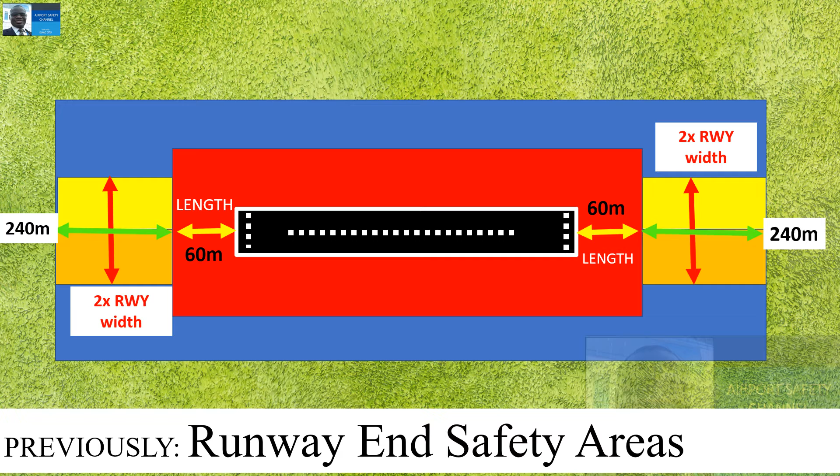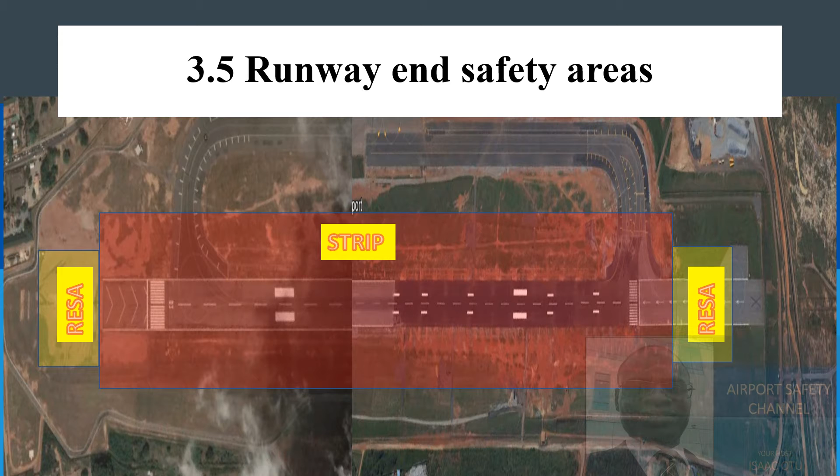Previously, we looked at runway end safety areas, and on your screen you can see the runway surrounded by the strip, and beyond it we have the runway end safety area. For a better visual display, you can see the runway surrounded by the strip. At the ends of the runway, we have the RESA as shown on your screen. It is very important that you have a clear mind on where the RESA is located.

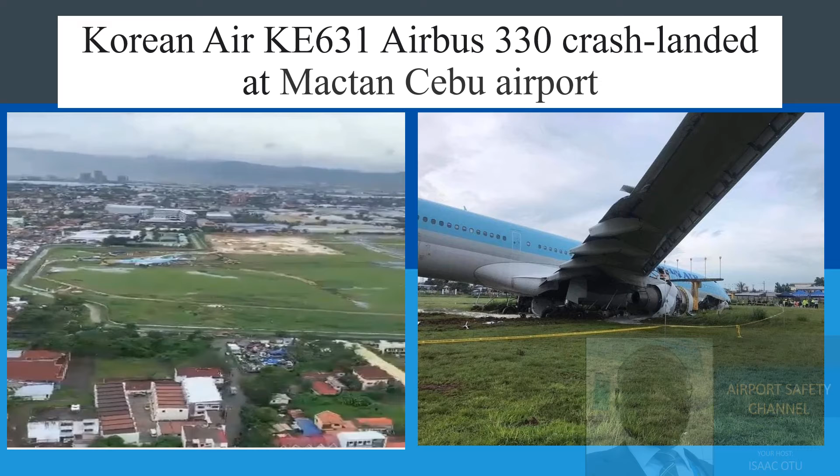In this picture, you can see a Korean Airbus A330 which also went off the runway and stopped in the runway end safety area. Yes, the runway end safety area is very important for aircraft safety. So, what do you look out for when you are inspecting the runway end safety area? Number 1 is objects on the runway end safety area. An object that can cause secondary damage to an aircraft must be removed from the runway end safety area.

Imagine the 2 aircraft which we just saw in the incident going into a wall or running into an equipment that can cause major damage. That may even lead to the loss of lives. So any equipment or installation required for air navigation purposes which must be located on the runway end safety area is required to be frangible and mounted as low as possible and sited in a manner such as to reduce the hazard to aircraft to a minimum.

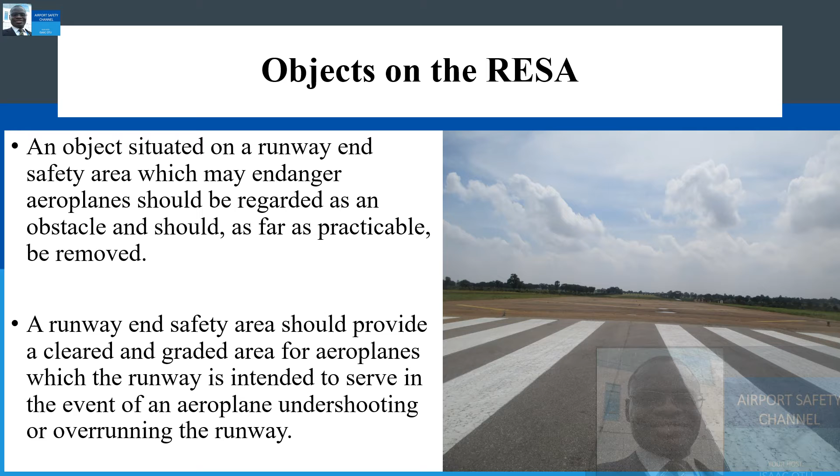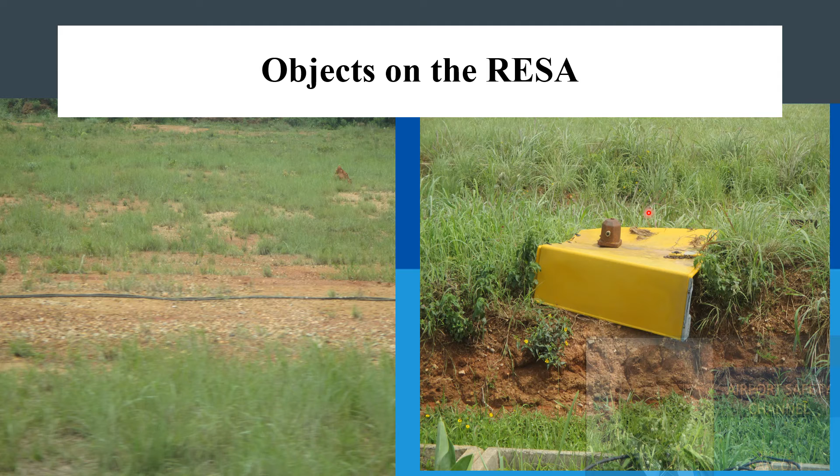It is very important. Also, the runway end safety area should be provided with a clear and graded area for aeroplanes which the runway is intended to serve. So you can see the picture showing a clear area without any objects that can cause secondary damage to aircraft. So once you find yourself in the RESA, look out for things like termite mounds which develop over time and can cause considerable damage to aircraft. Also look out for abandoned objects which have been left forgotten within the RESA and may become a hazard to the safety of aircraft.

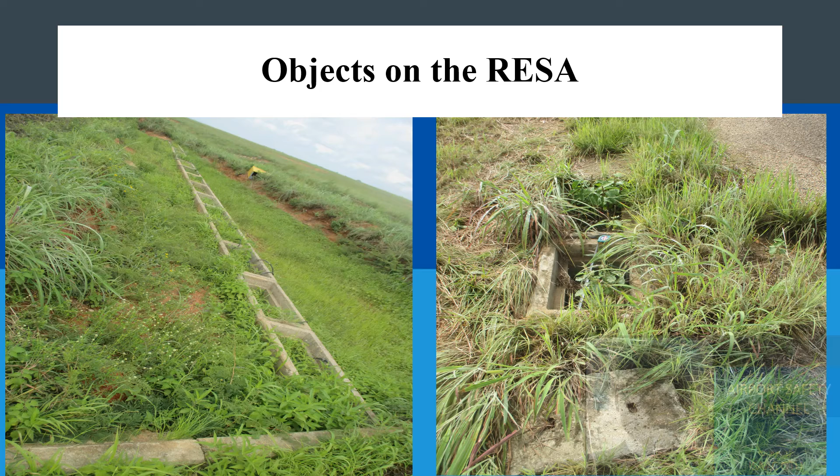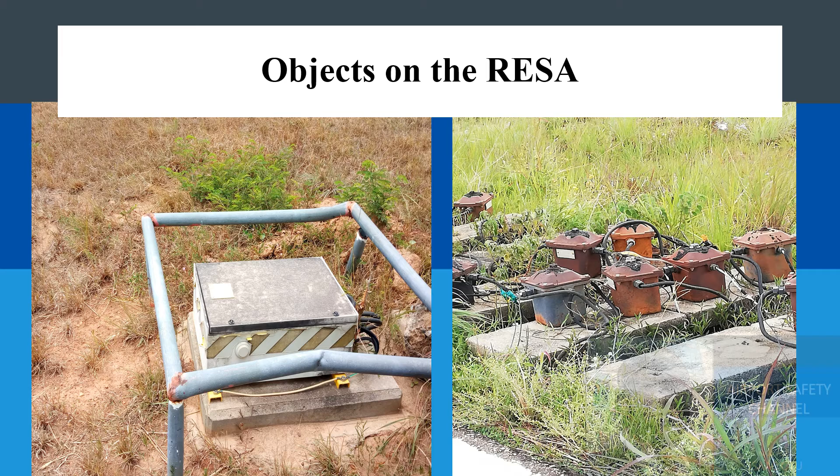If you look at these concrete slabs and these transformers sitting within the RESA, they are also not frangible and they stand the chance of causing major damage to aircraft that goes beyond the runway strip into the RESA. All these things must be changed and their condition worked on to reduce the damage to aircraft during an incident.

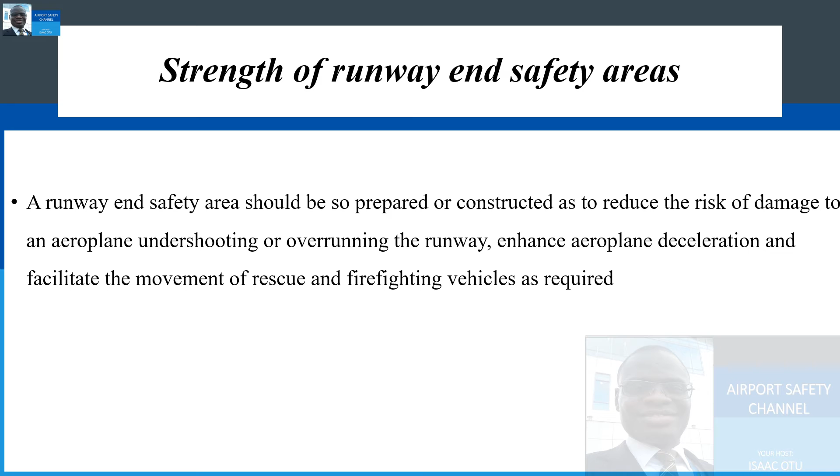Now let's look at the strength of runway end safety areas. Annex 14 requires that a runway end safety area should be so prepared or constructed as to reduce the risk of damage to aeroplanes, enhance aeroplane deceleration and facilitate rescue and firefighting vehicles moving within that area as required. So it is important that the RESA is strong enough to perform all these activities. It is important that you inspect your RESA under all weather conditions to be able to determine if your RESA can take the weight of aircraft or fire emergency vehicles during an incident.

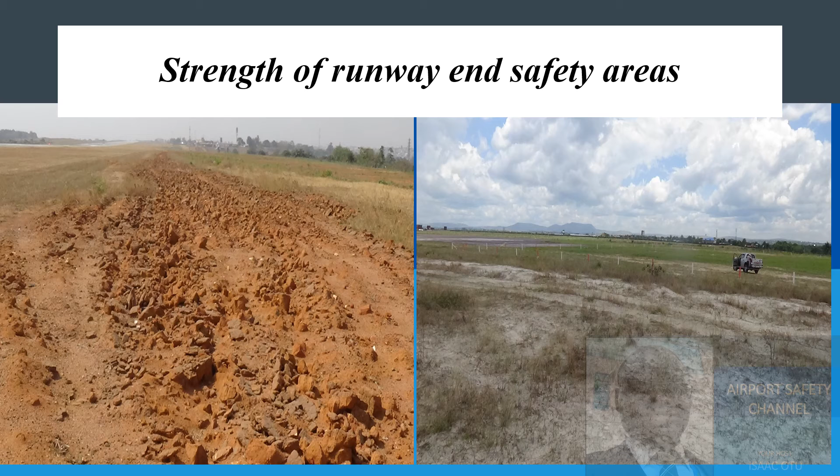It is also advised that you have a team that has good knowledge of the state of the grounds so that they can advise you appropriately. There are so many things that you can look out for when inspecting the RESA, and it is good that you have a team to advise. Look at this picture on the screen.

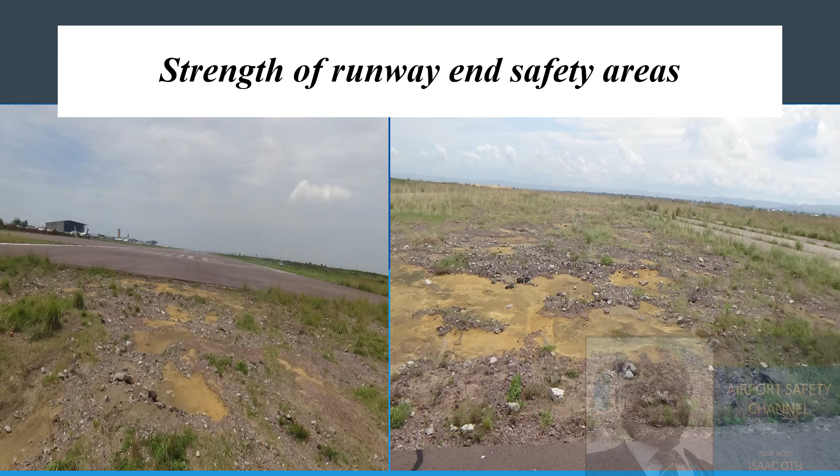In addition to these two things that we've looked at, I will encourage you to find out more about what you need to look out for when inspecting the RESA. The bullet for today is check. Every day, check and confirm that things have been done. Don't assume it's been done. Review the inspection records. Read the reports. Confirm all reporting processes have been acted upon and start again and check.